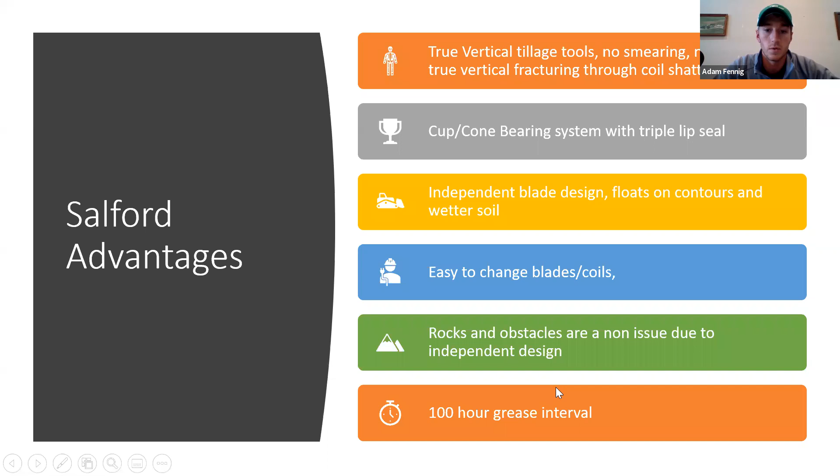They have a cup and cone bearing system with triple lip seal. Today, these bearings on these tools are tough to beat - it's not something we go through very often, they can take quite a beating. The independent blade design floats on contours and wetter soils, easy to change blades. Rocks and obstacles are a non-issue due to their independent design and the 100-hour grease interval on the blade hubs. The new tools are a big improvement over the 570 tools.

I talked to a lot of customers who owned 570s 10, 15 years ago, and they always say that tool just wasn't aggressive enough, and it gives them almost a bad taste about Salford in their mouth. But today, these tools are totally different from the old standard 570s - heavier frame, heavier undercarriage, narrower spacing, and the bearings are much better.

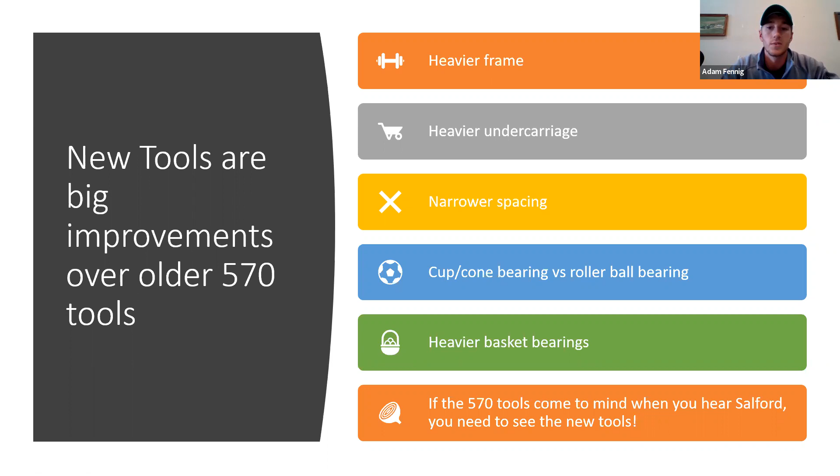Today, I would put any one of these tools up against these popular gang machines, and you would see a ton of advantages. You see a lot of those gang machines because they make it look pretty on top, and the mainline dealers tend to carry and support that idea. But Salford is totally different, and that's the whole idea of this webinar - to walk you guys through why the Salford tools are superior and which ones would work best for your scenario.

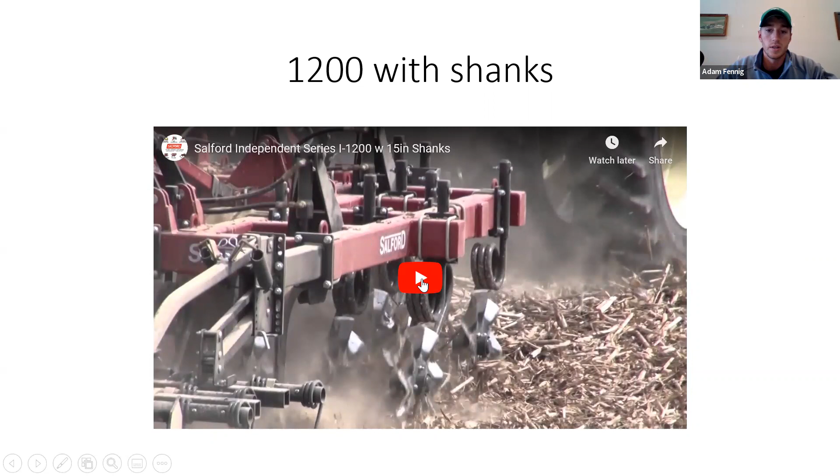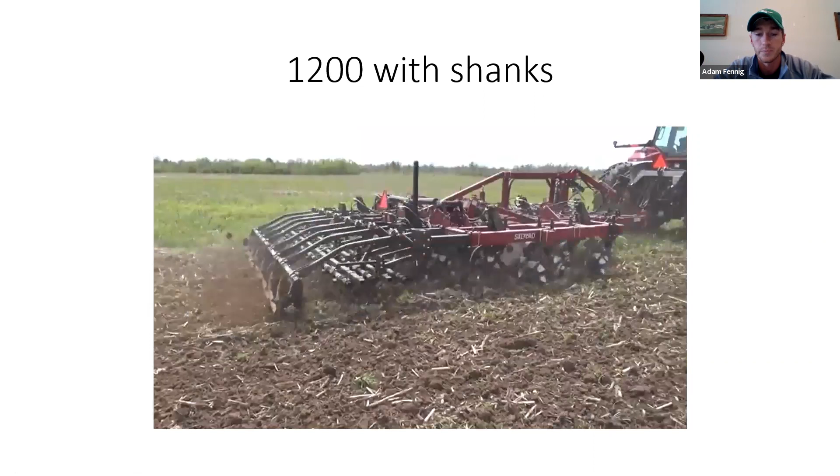So I've got a couple of videos that I want to show you guys real quick, just a Salford 1200. This is the 5-inch spacing tool, 20-inch blades with 1.5 coils. So he's working in some corn residue with some weeds in it - heavy residue in the spring. That ground was mellowed out quite a bit over winter, and it's making a really nice seed bed.

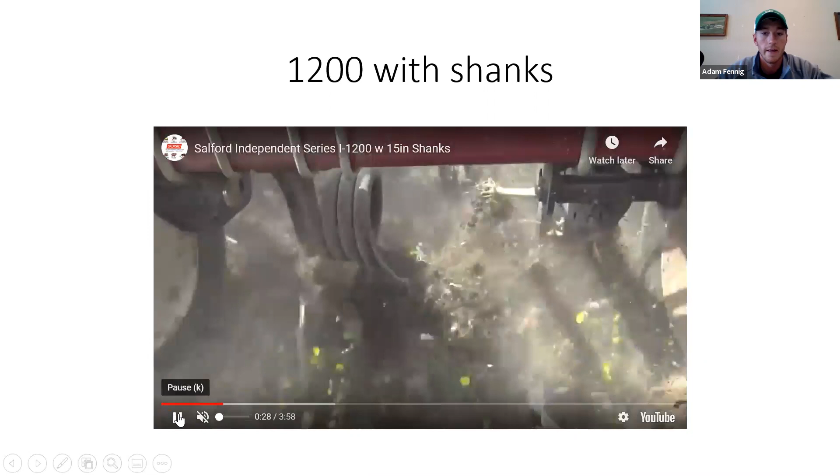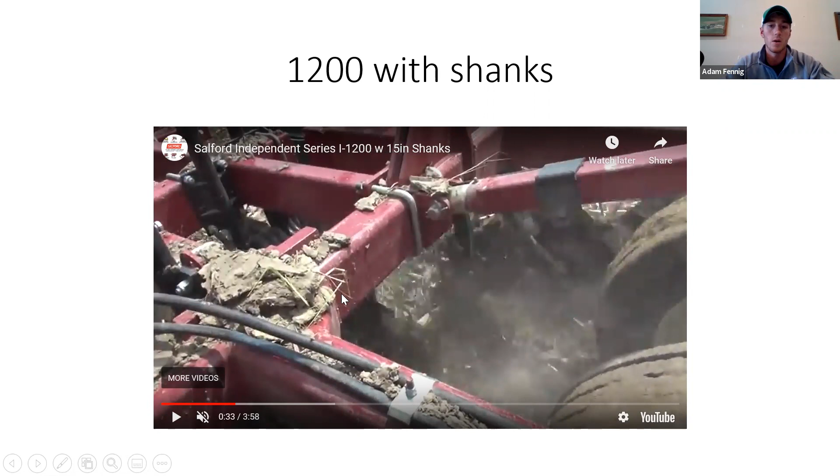He's actually not traveling at a real high rate of speed, but you can see right here in this clip - I'm going to stop it right here. This is where we get the jackhammering effect that I was talking about, through this coil design. As this coil moves up and down quickly throughout the field, that's where we get the shattering, the jackhammering, and the compaction breaking effect of these tools. If you watch this coil, it moves up and down and acts like a jackhammer to go down 3 to 4 inches below that blade and really help air out that ground. So that's the vertical tillage. All of these tools are finished off with a 3-bar harrow and 14-inch rolling basket.

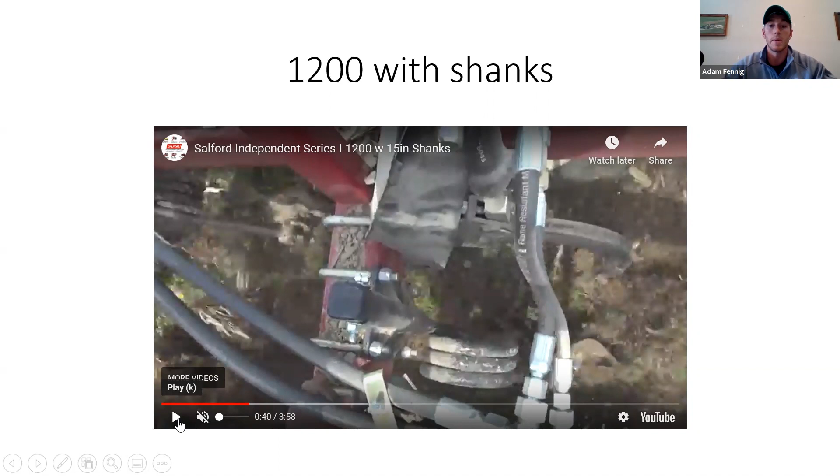Here's a video with the shanks in action. I haven't brought up the shanks yet, but the shanks are a great way to get a little bit more depth out of these tools. When you throw shanks at any one of these tools, it basically turns it into not only vertical tillage, but you can really dig in and get those ruts out, get the tire tracks out, work your headlands a bit deeper, and pull out some compaction that some of these tools just can't quite reach. The shank kit - you throw that on any of these tools and they're extremely versatile in what they can do.

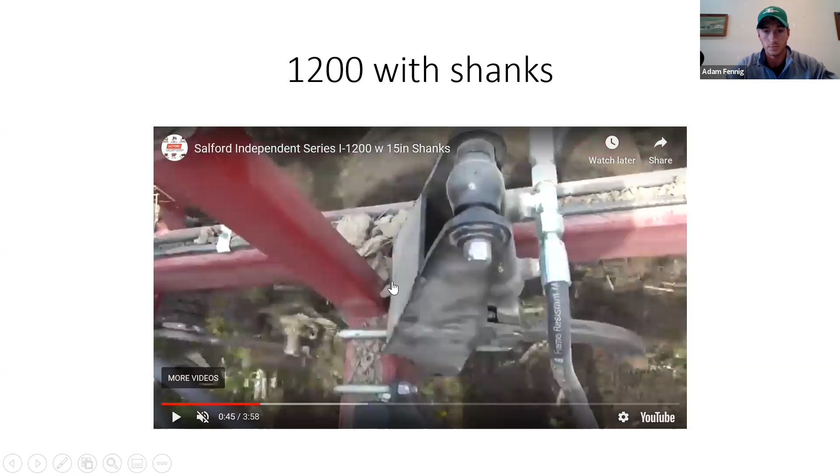So let's move on to the next one, the Salford 2200. You're going to see a similar finish and what this tool is doing compared to that 1200 you just saw. Basically 5-inch spacing again.

This guy's running a little bit faster, so you're seeing quite a bit of action out of that rolling basket. Basically what we're doing here is breaking the crust, airing it out, fracturing vertically, and sizing that residue on top while leaving it with a really smooth seed bed. We're going to dig through these numbers here in a little bit even further.

Here's a Salford 5100 running, our hybrid tool. The Salford 5100 has got blades in the front that lift, bury, and incorporate, much like you can see here. So these blades right here in the front, they're on a compounded angle. They're turned vertically and horizontally to lift and flip without creating a smear layer. And then the blades in the back are true vertical tillage to size and cut that residue.

You can see how well this tool does. It's similar to a field cultivator in the way it works. Here in the fall, I've got a lot of guys that use this to actually bury corn stalks because there's a lot of tools out there that just cut them and you get them blowing in the wind. But this tool does a great job lifting, burying, and sizing residue to create a perfect scenario in the spring where you can either stale seed bed it, or you can go in there and hit it real light once with a vertical tillage tool or something just to break it up and air it out.

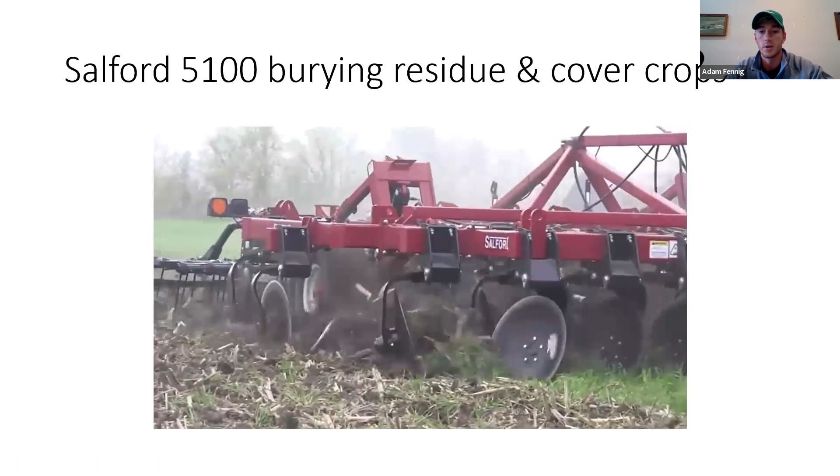But what's so impressive is how well this tool finishes. You can see there's not a lot of clods. It's not real clumpy. This stuff is going to overwinter extremely well. Maybe a 1-pass and plant for sure, and you'll be off to the races in the spring.

I've got another video here of a 5200, which of course would be the 5100, but on 5-inch spacing. So here is the design of those blades. You can see how they're turned on 2 different axes.

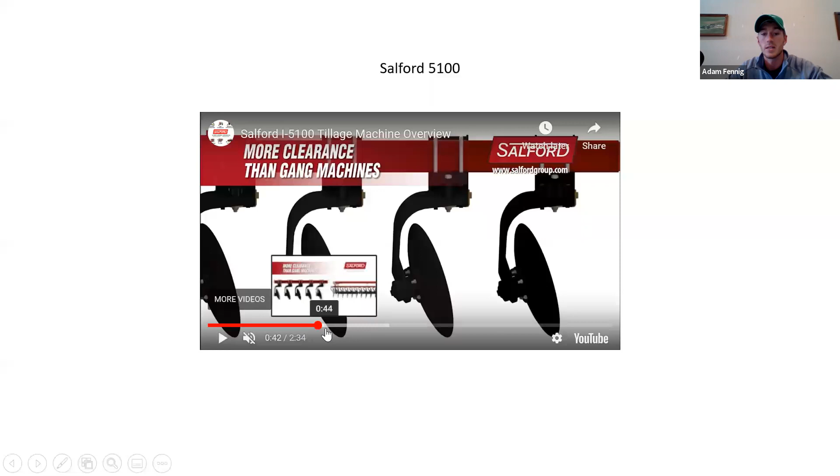That allows us to lift and flip without creating a smear layer that you can typically find with a gang machine. You look at the gang machine, they're only on 1 axis. And you're also dragging that blade sideways. So this blade runs sideways through that field and just creates a smear layer. And that's bad for your roots. The Salford fixes that problem with the 5200.

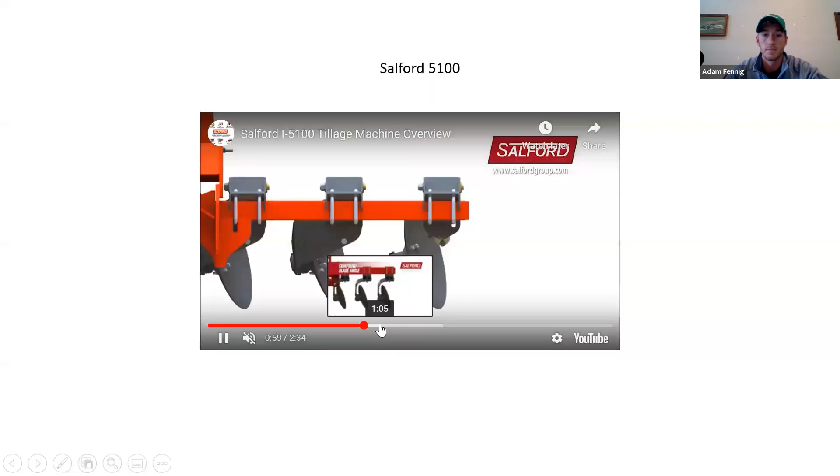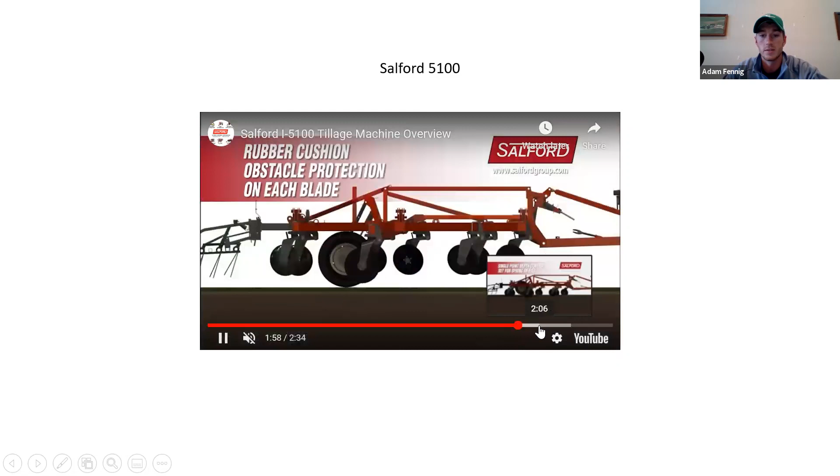Really like what this thing does, the way it finishes, how true it runs, and roughly 3 to 5 inches deep. You can see right there, this thing is built to incorporate at high speeds.

So I'm briefly going to talk about it. Of course, we're talking Salford tillage, so I've got to talk about all of them. And we don't often talk about their inline ripper. It's not just another inline ripper. This thing holds a lot of really true advantages compared to the competition.

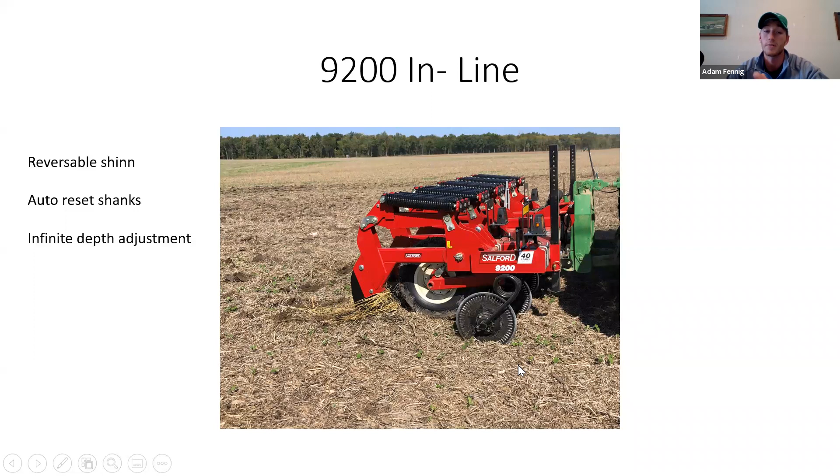We've got a reversible shin, so you get twice the wear life out of it. Auto reset shanks, of course, that's hard to find in the marketplace. Infinite depth adjustment, so you're not just locked into depths every inch or so. These are built in 5 and 7 shank models. I've got a 5 shank here in inventory if anyone would like to run our 9200 inline ripper.

Salford field cultivators, I'm not going to talk a lot about them, although they are the superior cultivator on the market. We're mainly going to hone in on fall tillage tools, being that it's that time of year. But once the calendar turns to 2020, we'll definitely be doing webinars on what sets this Salford field cultivator apart, no doubt.

So I'm going to turn our screen back here over to the Salford Independent Series lineup and go through their book. This book actually has a lot of really good details and specs about what sets the Salford tillage tool apart.

So they talk here briefly about compaction and how it inhibits air and oxygen from getting down into the soil. And that's exactly what these VT tools were designed to do, is to break that compaction and introduce air back into the soil. They do an extremely good job of that, and it's done by that jackhammer effect of that coil.

So if we go through here, they create very good visuals to show disc gangs versus independent coils and what the benefits are. The obstacle protection - if you get a rock, it's not going to affect any other coulters, much like it does on the gang machine. The Salford Independent Series handles contours much better. The residue flows through there - you don't have the scrapers and the gangs to block that, so residue flow is optimized.

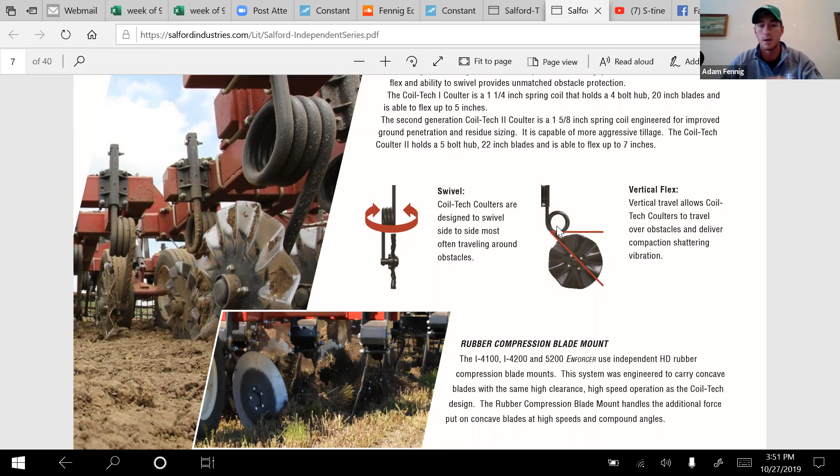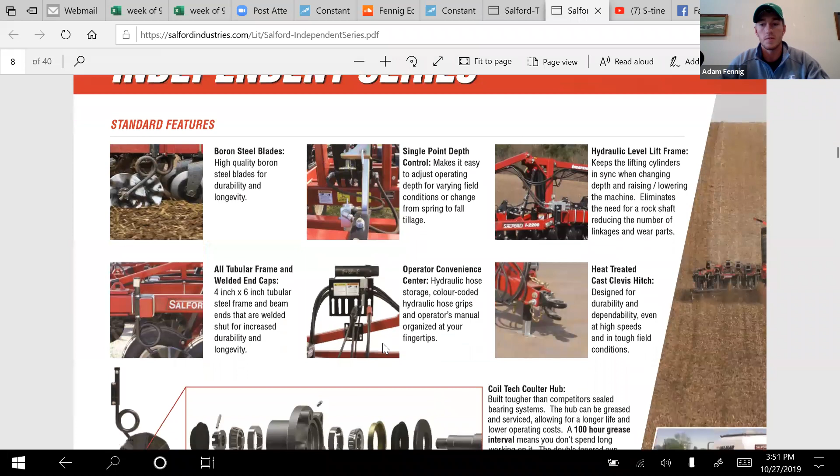So, of course, boron steel blades, single point depth control. If you study the Salford tools and their quality, it's hard to beat the quality that comes with the Salfords. Here's a blowout version view of their bearings and seals.

One thing I haven't brought up yet is you guys in Ohio and Indiana, there is a Salford depot located in Sidney, Ohio. Most people do not know that. The Salford depot carries enough parts to basically build one of these Salford tillage tools. So if Fennig equipment doesn't have it in stock, it is at the Salford depot. So you will never be down for long periods of time. If you do break a coil, break a walking tandem, or something goes wrong, we have you covered. Salford's got your back here in Ohio.

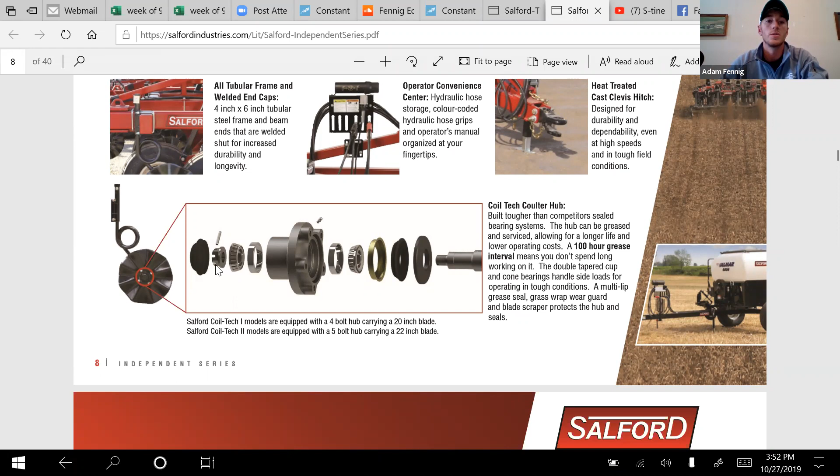So of course, all these hubs and bearings and castle nuts and rolling baskets, they're in stock here in Ohio. So that's a good peace of mind for everyone in the general location.

Here's a really good visual of their switchblade shanks that I was talking about. You can add those. Mainly, guys are adding those to that 4000 series tillage tool.

The flex finish basket - this is something that's been a big advantage or a big seller for people, mainly in the 4000 and 5000 series lines. And that's because we usually run those tools a lot in the fall, and we're usually going 3 to 5 inches deep. And, you know, everyone just got an inch to an inch and a half of rain, and we can sometimes be bringing up a little bit of moisture. You can actually lift that rolling basket out of the ground with the hydraulic flex finish basket. Because we're doing this in the fall, our finish isn't extremely crucial like it is in the spring, but it just gives you another option.

Today, the rolling basket is mounted on a 4-piece torsion. This allows it to flex a little bit. Some of you guys who have the older tools are used to the U-bolts. Those U-bolts would break over time because of the moving effect of the rolling basket. The new torsion has certainly taken care of that.

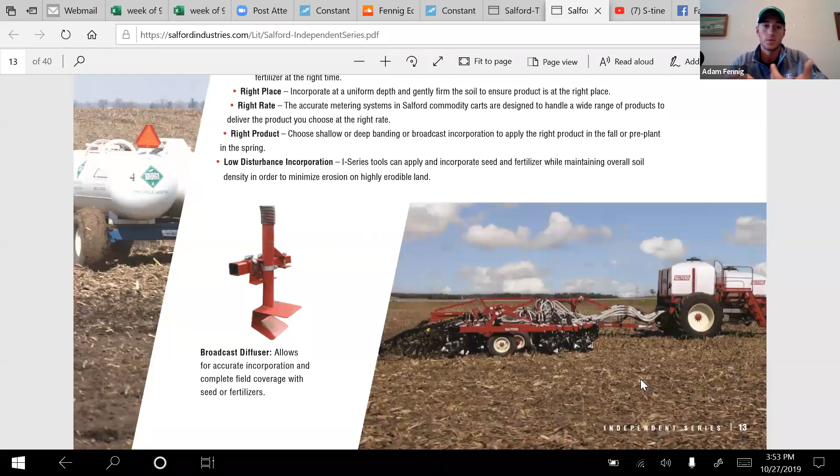Of course, you guys have seen the cover crop seeders mounted on top of these vertical tillage tools. We'll briefly talk about that here and get into it a little more later. If you own a vertical tillage tool, you basically own a drill that can seed wheat, cover crops, and yes, even soybeans. Barley is a big one, and of course rye. If you want to seed anything with it, you certainly can - it's already been done. Guys are seeding all kinds of stuff with their Salfords.

So I'm going to go back through the book and re-talk these numbers to really hone in and tell you what tool does which one, so that when this webinar is over, you know whether that 4000 tool is what you're looking for, or maybe that 1200 is what you need - to give you guys a good idea.

So this 1100 - okay, the 1100 is our basic standard base model vertical tillage tool. It's on 7.5-inch spacing, 20-inch blades. This is what replaced the 570. So if you own a 570 today but you're looking to upgrade, and you like what the 570 does for you, this 1100 is definitely for you.

It is not designed to take out ruts. It is not designed to fill in holes. This tool is designed to go out in the spring, create a perfect seed bed, air out the soil, and break down compaction - that's what it's designed to do. It would also be a great tool for seeding cover crops. You're going to work that soil 1.5 to 3 inches deep with the 1100. In the fall you can go a little deeper, but in the spring, 1.5 to 3 inches.

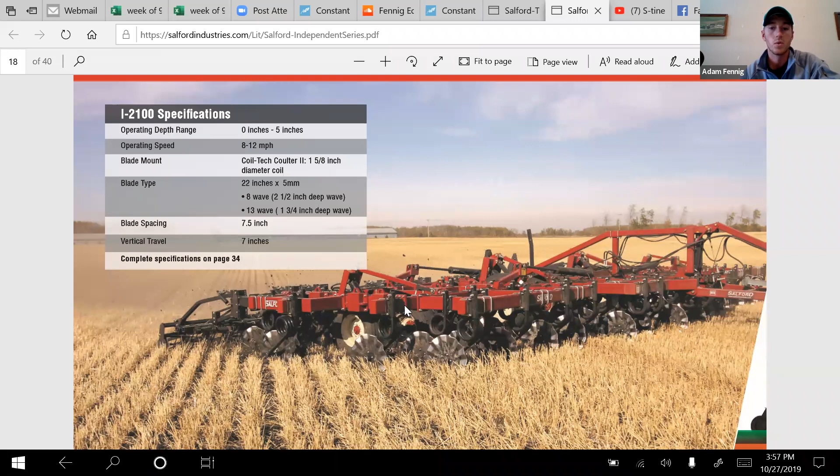Does a great job - I love this tool, mainly in the spring. The 2100 is a very good choice, extremely well built tool.

2200 and the 1200 - think of those two tools as almost one and the same. There's a few differences between them, that being the 2200 has a 5-bolt hub, 22-inch blades, 1 5/8 coils on 5-inch spacing. This thing's actually going to do a little more work than the 1200. It'll come with a notch more horsepower, but if you like what the 1200 does - the surface dirt movement, the 5-inch spacing - the 2200 is a step above that. It'll maybe penetrate a little better in harder conditions where the 1200 won't go as deep. The 2200 has more weight, so you'll vertically fracture a little deeper. 22-inch blades, 5-bolt hub, built for longevity, 1 5/8 coils - so again, a souped-up model of the 1200.

Comes with a little extra horsepower. Price point's a little bit more, of course, but you run the 1200 and the 2200 side by side in the field, it's going to be pretty close when conditions are the same.

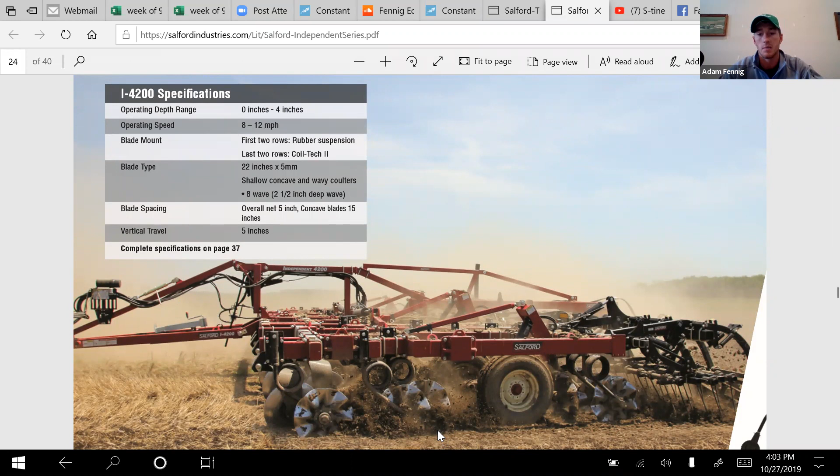You can tilt this tool forward, you can tilt it back to get it more or less aggressive. And man, there's not much that tool right there cannot do for you if you're looking for a heavy duty incorporator. It will not take the place of our vertical tillage series, but if you're looking to do more, that's a tool for you.

This 5200 is a tool that I really love. Salford outdid themselves when they came out with this 5200. It's a tool that's so extremely fun to demo to guys because they've never seen anything like it. This is not your standard 2-row short disc. In fact, this is a long disc.

What I mean by that is there's so much dirt movement and action, and you saw that in the videos I showed you. We might go back to those videos here in a little bit. But this is a tool that's going to take heavy residue and just turn it black. Take manure, completely incorporate it 3 to 5 inches, but leave such an extremely smooth finish that you're just blown away. You walk across this dirt after you've run it, and it's as soft as a pillow. You can't find any compaction smears, and guys just look at you and wonder how in the world that tool did it. It's similar to a plow in a way.

This tool does take some serious horsepower. If you're wanting, we've got a 12-foot 5200 to demo to you. That's going to take 200 horse. A 16-footer is going to take 320. So definite horsepower, but man, what this tool can achieve is unlike any other tool out there.

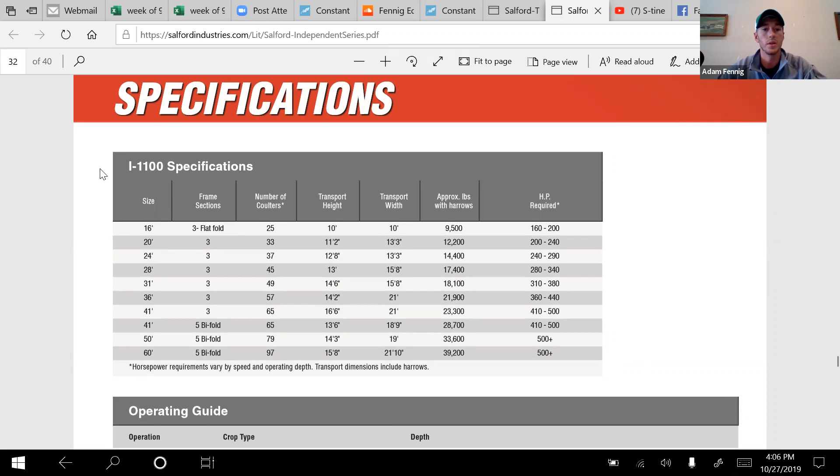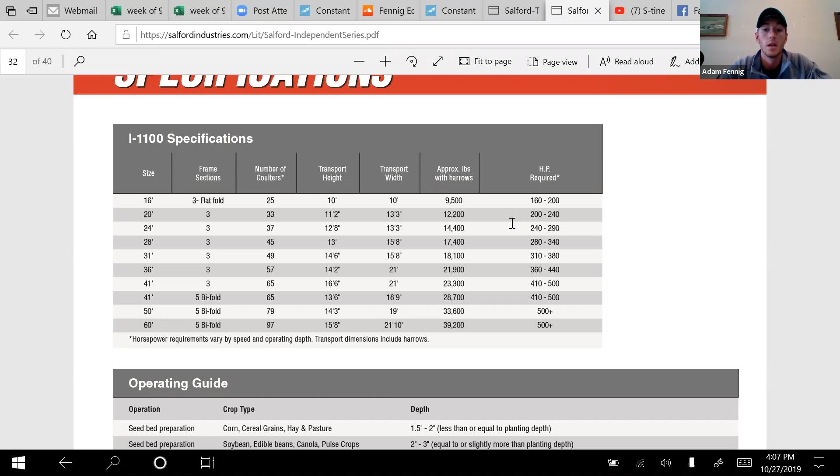Real quick, I want to run through the specifications and sizing options of these vertical tillage tools. You can get these in 16 foot, and then 20, 24, 28, 31, 36, 41 5-section, 41 3-section, and then 50 and 60. I really like how Salford lays out these charts. They give you your transport height, transport width, number of coulters, your weight, and your approximate horsepower. I will tell you, typically you don't need quite as much horsepower as what they call for there - that's just based on my experience, but the true test is whenever we take it to your farm. But those are the sizing options, and that's true on all vertical tillage tools: 16, 20, 24, 28, 31, 36, 2 41s, a 50, and 60.

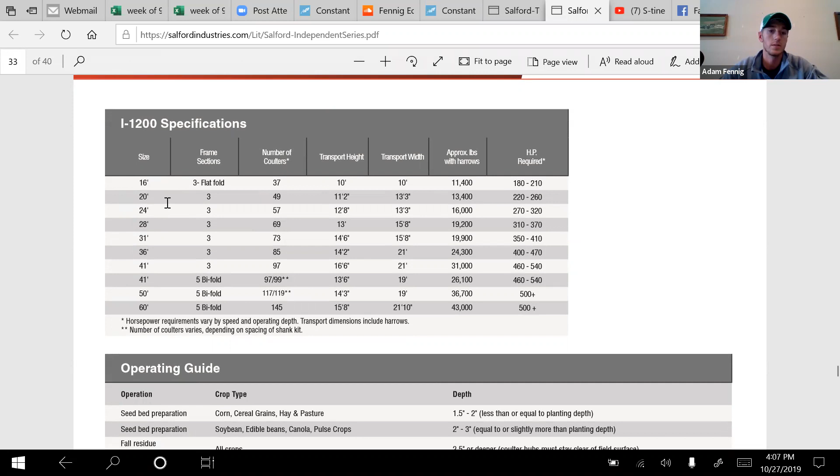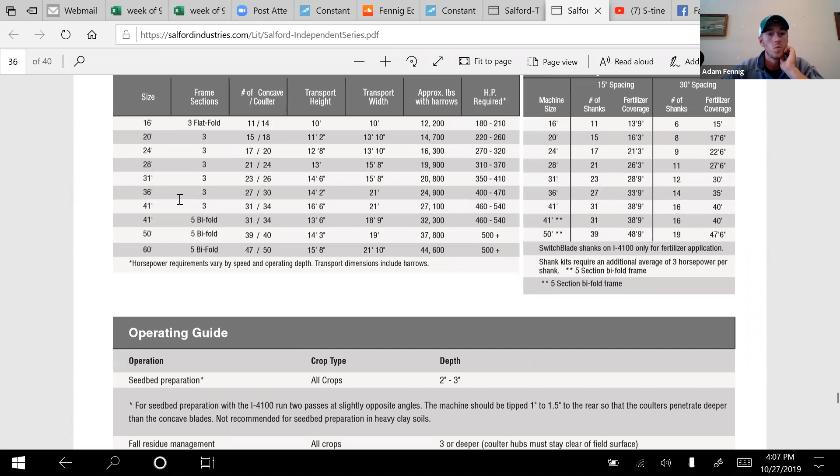That holds true for the 1100, 1200, 22, and 2100. Get down here to the 41, and it's basically the same. The 5200 is a little bit different: 12, 16, 19, 22, 25, 29, 36, 39.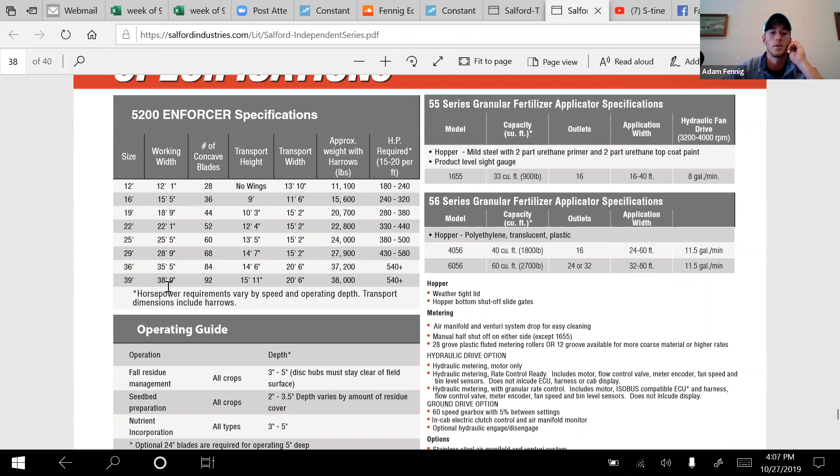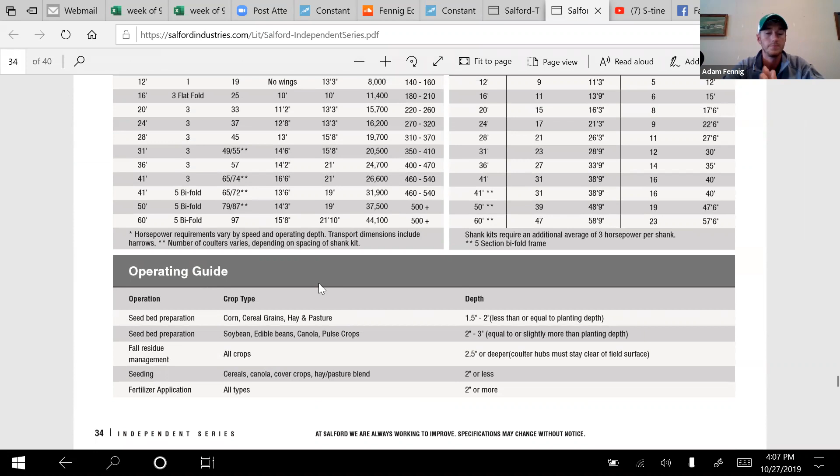This manual right here is available on Salford's website. I urge you to go to salfordindustries.com. That'll show you all types of videos. It'll show you this independent series manual, which has a ton of information in it for you guys that are interested in Salford tools.

I think I want to work on wrapping up the webinar at this point. We covered a lot of ground. I don't want to hold everyone up too long. I know there's a decent football game on today, even though the Cowboys have a bye, so there's not much to watch.

But I will say, the whole idea behind today's webinar was that guys are halfway through harvest, probably haven't started to get real aggressive on tillage, had a rain delay. Now is a perfect time to think of your fall tillage scenario and how Fennig equipment can help. So I want to real quick run through again the tools and what they can offer for you.

This fall, a tool that would work great for you is the 2200. Here's what they're going to do for you this fall. In corn stalk ground, they'll do a great job of vertically fracturing. We've talked about that. They're going to size residue, and if the ground has enough moisture in it, they're going to pin those stalks to the ground. Salford does a better job than most at actually pinning those stalks to the ground. Now, if it's dry and extremely hard, I'm going to tell you that you're not going to want to just run them in the fall. All you're going to do is size some residue.

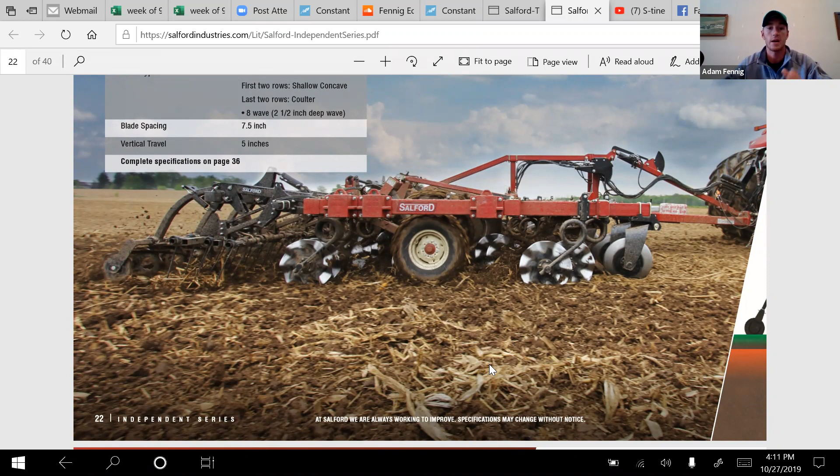The 1200 tool, that's my other option for you—the 2200, I'm going to categorize them together. With 7.5-inch spacing, they're going to move surface soil, move surface residue, really break the crust, really vertically shatter, but create an awesome seed bed. They are the true one-pass tool you can always plant behind no matter what—the 1200 and 2200.

The third tool I'll throw at you for fall is the 4200. Basically like a field cultivator—lift, flip, incorporate, size. But man, that thing creates a perfect seed bed. So hopefully this gets your guys' brains thinking.

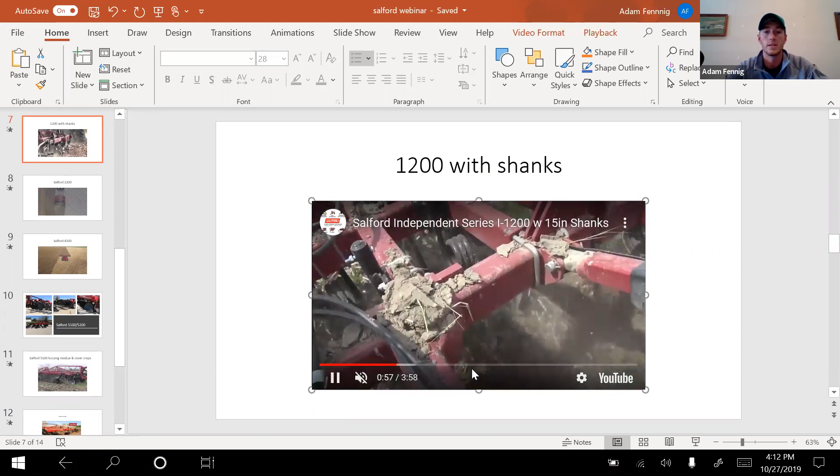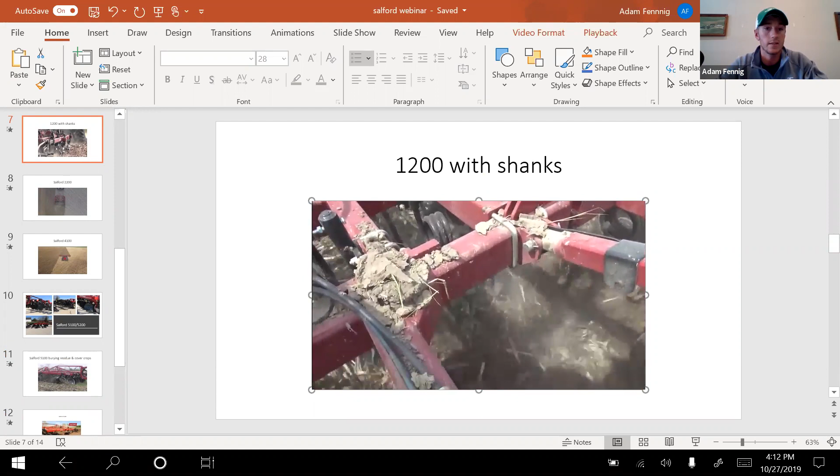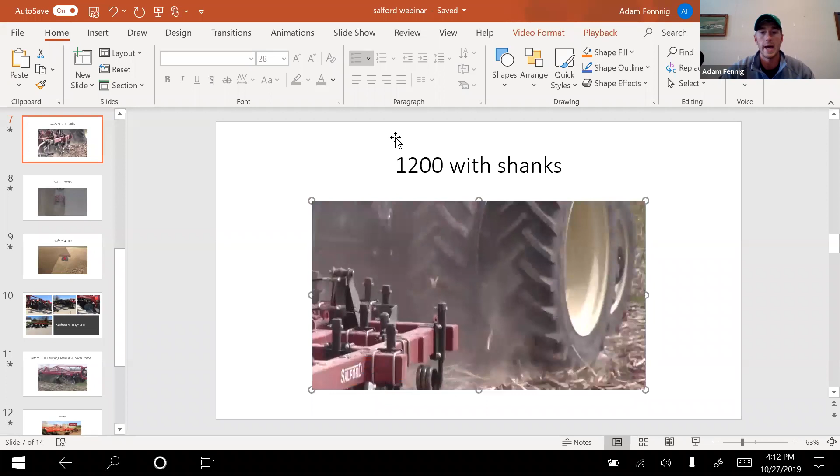Here's a 1200 running—vertical fracture, good bit of dirt movement. The 3-tine harrow does the leveling, and the rolling basket crumbles and creates that smooth seed bed.

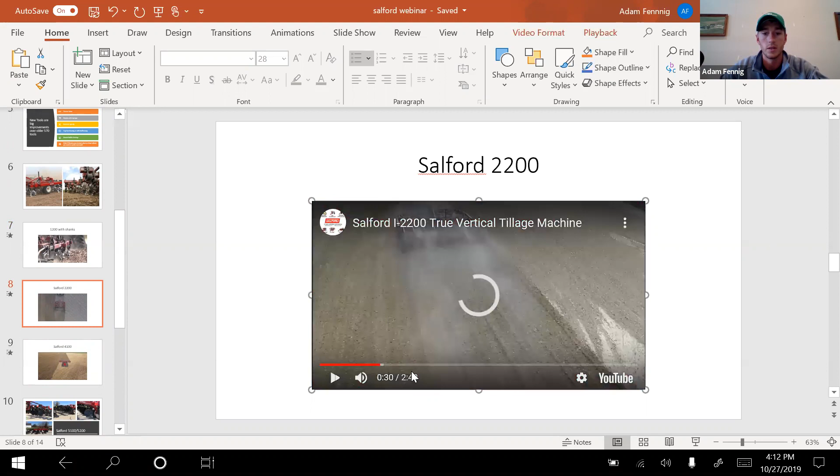From there, the 2200, extremely similar in what it's doing. Right there's a good view of it—1 5/8 coils, a little bigger around, 22-inch blades, 5-bolt hub. That's a great tool.

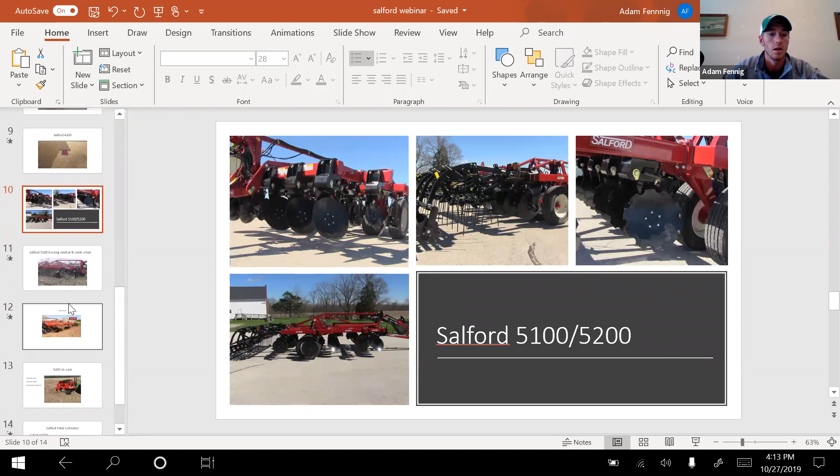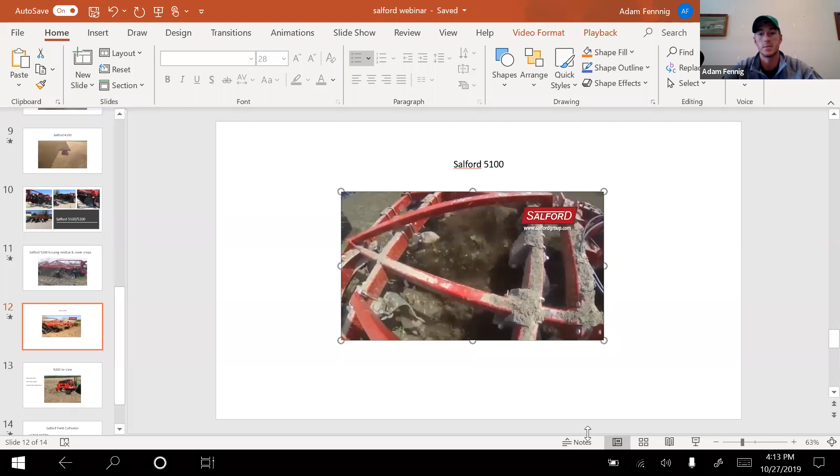Last video I'm going to show you is another one of the 5100. Look at that dirt incorporation. The reason I call this one a long disc is because of how long this tool is. This dirt just gets shaken up and mixed back and forth throughout those 4 gangs until it's 100% mixed, and then it gets finished off with the 3-tine harrow and rolling basket.